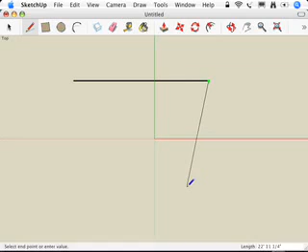Okay, let's start with the line tool. The line tool looks like a pencil, and it works like this. If I basically just draw some edges here, all I'm doing is clicking a whole bunch of times. When I click at the end of the first edge that I drew, I end up with a face. It's pretty simple, really. Let's go ahead and grab the select tool, select everything, and delete that away.

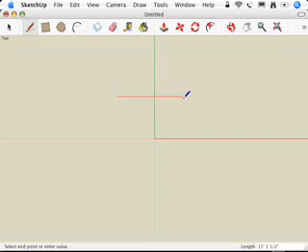Let's say I just wanted to make a simple rectangle. What I'm going to do is start drawing an edge, and then I want to draw parallel to this red axis. So I'm going to make sure that I'm drawing in the red direction, and then I'm going to come down in the green. Let's go back over in the red, click, and back up here, just like that. Now, if you need more information about the line tool, you can read about it all in Chapter 2, if you like. There's a lot more information there.

Okay, the thing to keep in mind about the line tool is not to use it this way. Watch. What I want to do is click, click, click, click, click, click, just like that. But I'm not holding down my mouse when I'm not actually clicking. A mistake a lot of people make is they go click and hold down the mouse,

and then what they're doing, right now I'm sort of gritting my teeth and dragging on this mouse with my finger on the button to draw that line. I'm going to let go, and then I'm going to click and drag and let go here. And that, you know, it works, but actually it causes a lot of inaccuracy because it's harder to let go accurately of the mouse button than it is to just very simply click, click, click like that. Okay, I hope that makes some sense.

Next tool I'd like to talk about is, oops, did you see what I did there? Let's explain that. When I was drawing over here, you see how my line is sort of stuck to the end of my pencil there? If I want to get rid of that line without changing tools, I'm just going to go up and hit the escape key on my keyboard. Just like that. When I hit escape, it kind of snips the line the last place I clicked.

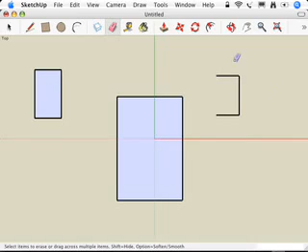Okay, the next tool I want to talk about is the eraser tool. I'm just going to click on that up here. And there's two basic ways I can use erase. I can click on edges that I want to erase, click, click, just like that. Or I can click down and drag over a bunch of different edges to erase all of them. So watch. Click, drag, just kind of select all of them with the eraser, and then I let up, and I've erased that whole thing, just like that. Nothing much to the eraser tool. Click or drag, it works both ways.

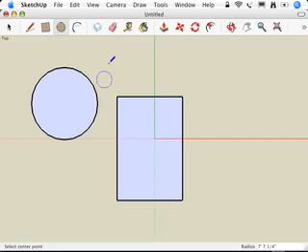Let's talk about circles. This is the circle tool. It's pretty simple. I click to define the center, and then I click to define somewhere on the perimeter. Pretty simple, just like I said. Let's practice the eraser tool. Erase, erase that circle, just like that.

The arc tool works like this. I click once to define one end of the arc. I click again to define the other end of the arc, and I click a third time to define what's called the bulge. Notice it says bulge down here. The bulge isn't the radius.

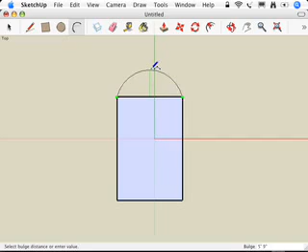It's sort of the length of the little green line that's right underneath my pencil right now. It's the amount that the arc sticks out. The little tooltip that you need to know about probably is if you kind of move this, eventually you'll hit this little thing that says half circle. And that's handy because a lot of the time you kind of do want to make half circles. So when you see that little half circle tooltip, click and you'll have a half circle. And you know, the world will be a better place.

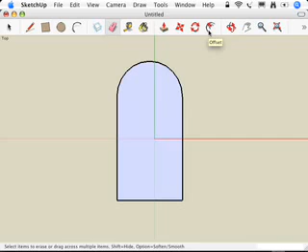Okay, so I've got an arc. We covered circles. What I'm going to talk about now is the offset tool. Before I do that, I'm going to take the eraser and just erase out this edge like that. And let's go up and get the offset tool. Now, offset looks like a couple little concentric rings with a little red arrow in it. It's right here.

And the way that it works is I can click on a face in my model, and when I click and then move my mouse around, I end up with a bunch of edges that are concentric. If it's possible to make concentric edges without having a circle, then these are concentric. Basically, they match inside or outside the edges that bound the shape that I clicked on. Okay, so I'm going to click there. And what I've got now, if I go up and get the select tool, is one face here and a face there. So I was able to create another face at an equal distance inside the first face just by using the offset tool.

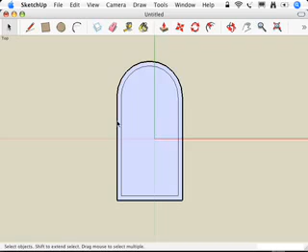Okay, let's say that I wanted to offset not all four edges, but just these three edges. 1, 2, and 3 right there. I'm going to go up, I'm going to select those first, then I'm going to get the offset tool, and I'm going to offset those three edges away. Now, the cool thing there is that I didn't end up offsetting all 4, right? I just offset those 3 that I selected. So you can use offset on faces, and you'll do the entire perimeter of the face, or you can use it just on pre-selections of edges.

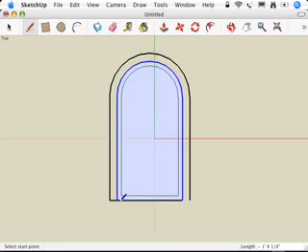What I'm going to do here is just kind of finish these 2 edges off with the line tool, just like that. And when I do that, I end up with a nice little, I guess I've got sort of a little half-round window or something like that. Maybe it's a door. I don't know. Doesn't really matter. One thing I might want to do is measure it.

So that brings us to the last tool in this section. That's the tape measure tool. It's right up here next to the paint bucket, between the paint bucket and the eraser. Looks like a tape measure. Click on that. And the key here is to watch this little VCB area down here in the lower right of your screen where it says length.

Watch. I'm going to click and then click over here, and it's going to say that was 15 feet and ½ an inch. Or I could say, let's measure from there to there. That's 21 feet, 9¼ inches. Now, that's a really simple use of the tape measure tool, just to measure things. The other thing that the tape measure tool does is create guides. And guides are basically pieces of construction geometry that you can use when you're modeling. And we're going to get into that later.

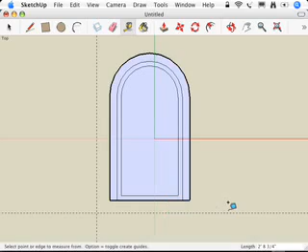Let's create a guide. Click and bring it out. If I want to make a guide that's parallel to this edge that I'm on, click and bring it out, just like that. And you can type in distances and all kinds of stuff, but that's a brief introduction to how that works.